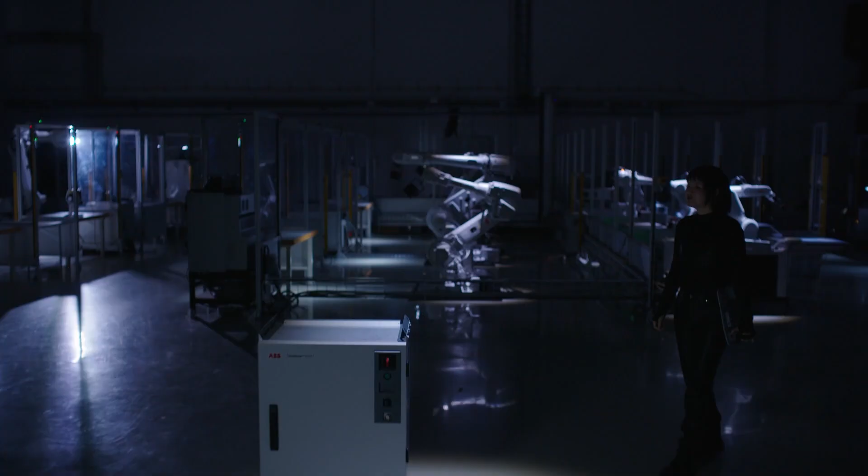Over the course of our programme, I'll be welcoming ABB Robotics leadership as they introduce the latest milestone in ABB's history of innovation, entering a new era of intelligent automation. Later, we will see this groundbreaking innovation in action with a truly spectacular feat of robotic programming, something you don't want to miss. Following that, I'll sit down with our leaders to answer some of your questions live. But first, to tell us more about this exciting announcement, please welcome President of Robotics and Discrete Automation, Sami Atiya.

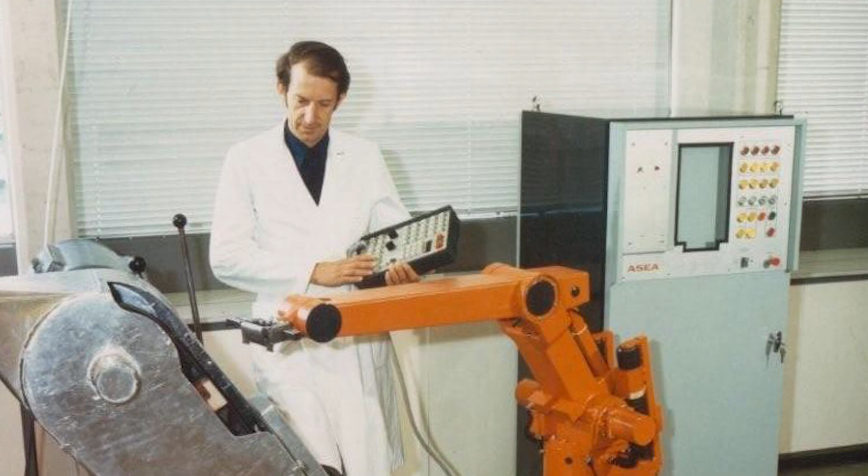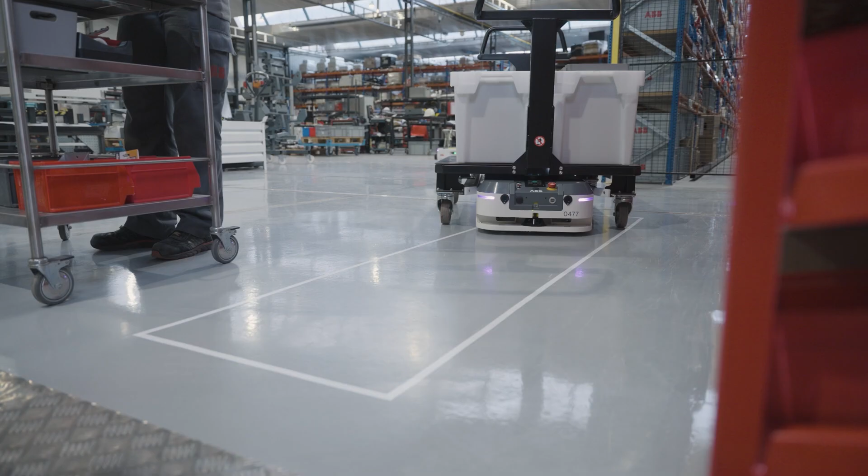50 years ago, in 1974, ABB launched the world's first microprocessor-controlled robot. In those early days, we focused on large industrial robots, primarily for the automotive industry. Since then, we have expanded our mechatronic platform to meet the needs of multiple industries, developing a unique offer, including autonomous mobile robots, cobots, industrial robots, and machine automation solutions for the entire value chain. We have also continuously evolved our software, including AI-based solutions, building on an integrated mechatronics offer that is meeting more demands for more industrial sectors. Since RobotStudio was introduced in 1998, it has revolutionized programming, opening the doors for working with our robots without the need for specialist programming skills.

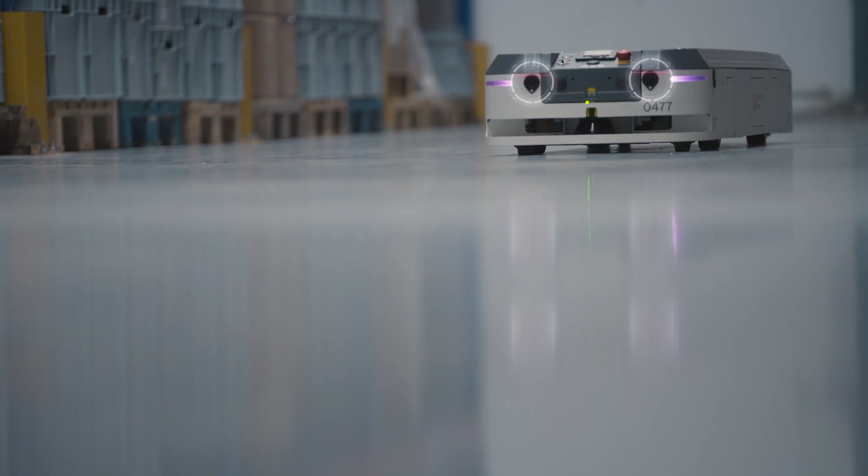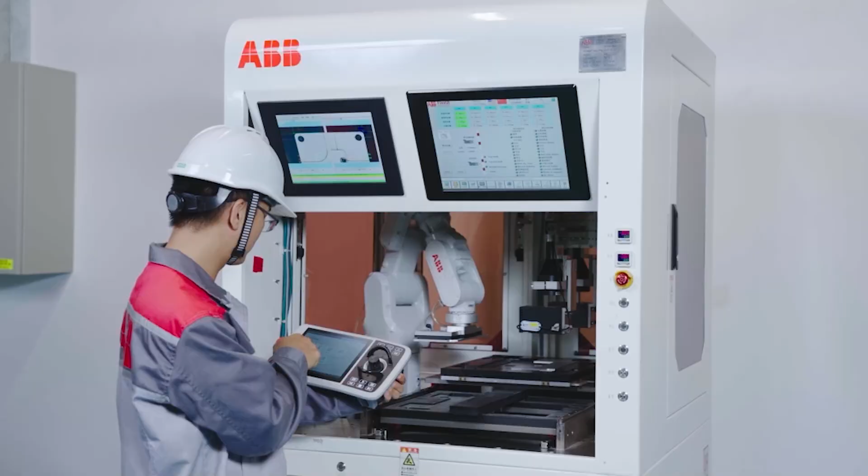Early this year, through our acquisition of Sevensense, we brought industry-leading AI-based navigation technology to our mobile robots. As a result, our robots are more accessible, more capable, more flexible, and more mobile. They are able to work together with us, with each other, to take on more tasks in more places, handling the jobs that people are no longer available to do, and enabling workers to take on more rewarding roles. And in doing so, making our customers more productive.

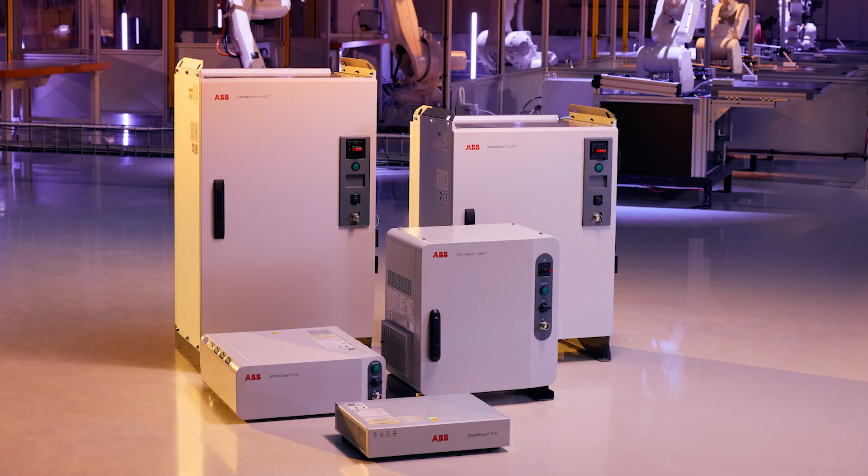But the inescapable reality is that more technology can create more complexity for operators. That is why today I am delighted to announce a new milestone in our journey towards a new era of intelligent automation. A unique single control architecture offering one platform and one language to integrate our complete range of hardware and software. We call it OmniCore. OmniCore is part of an over $170 million investment in next-generation robotics hardware and software at ABB.

OmniCore is a step change in integrating and managing multiple robots in an automated system, the latest and greatest advancement in robotics control. For our customers and our partners, OmniCore enables us to channel our sector expertise and the breadth of our robotics hardware and software portfolio under one platform to make it easier than ever to harness the full power of ABB Robotics. For our customers, it provides even greater simplicity and flexibility.

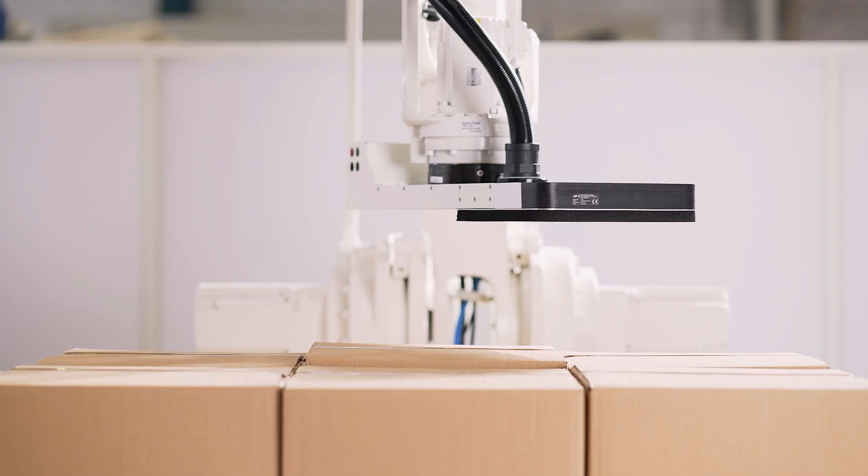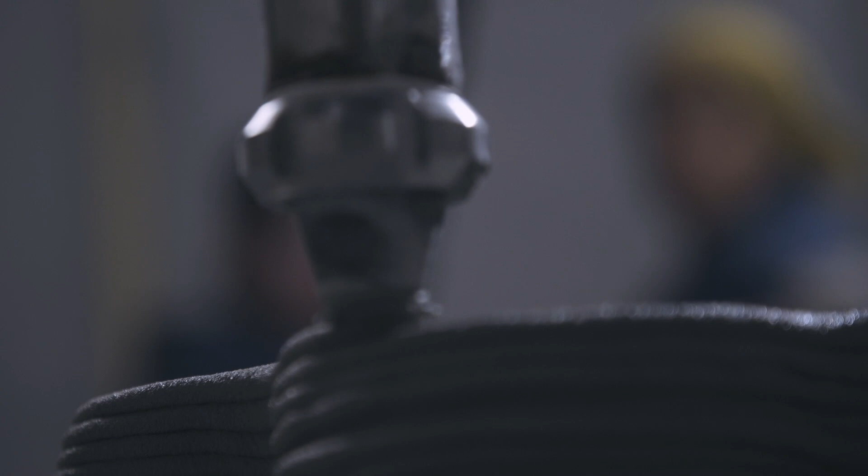Flexibility and simplicity are increasingly critical operational factors for our customers, for whom automation is becoming a strategic requirement. Three of four European companies struggle to find professionals with the necessary skills, such as welding, for labor-intensive operations such as logistics and fulfillment. Similar forecasts in the US suggest that more than 2.1 million manufacturing jobs there will be unfilled by 2030. The shortage of these skills is a global trend, and it's just one that is impacting businesses right now. There are other challenges for businesses today, such as global disruption and uncertainty in supply chains, and the pressure to produce more sustainably.

This creates an overriding need for automation, and a need, in sometimes complex tasks and processes, to provide robots with new skills and make them accessible to non-experts. The answer is in advanced software and control. Through a single platform, OmniCore empowers businesses to work more flexibly and sustainably, building resilience and boosting productivity. It enables automation that is faster, more precise, and more capable, able to deliver higher speed, greater accuracy, and more functionality. And it is future-proofed, with new possibilities for incorporating AI and cloud-based solutions.

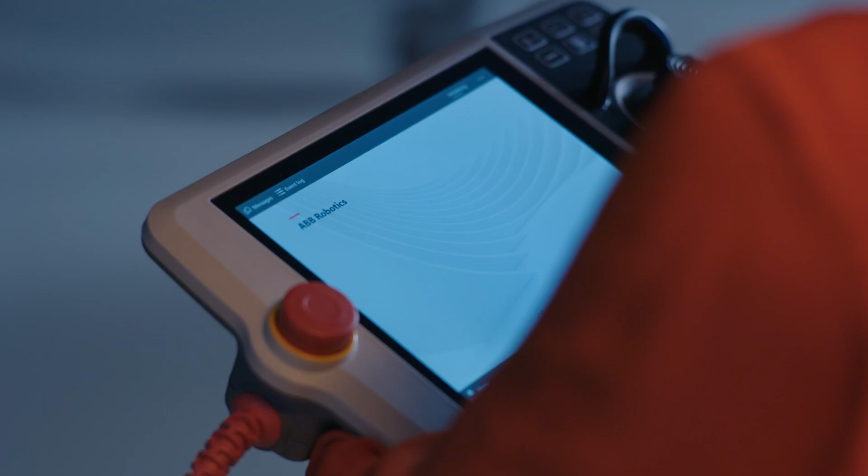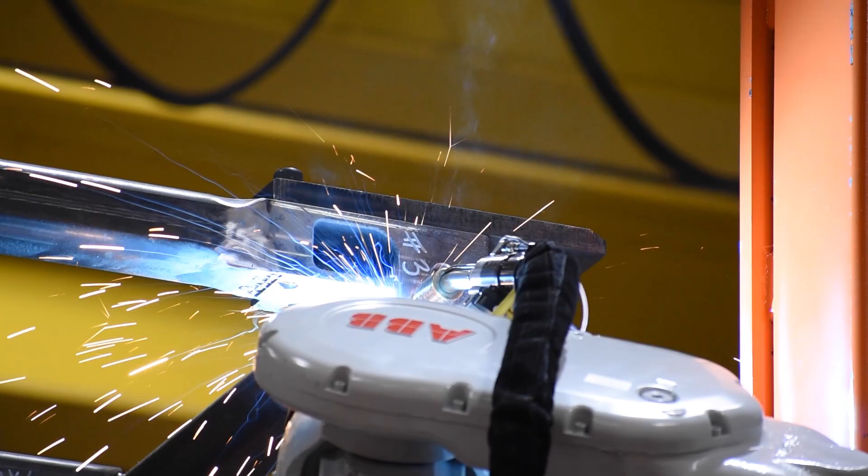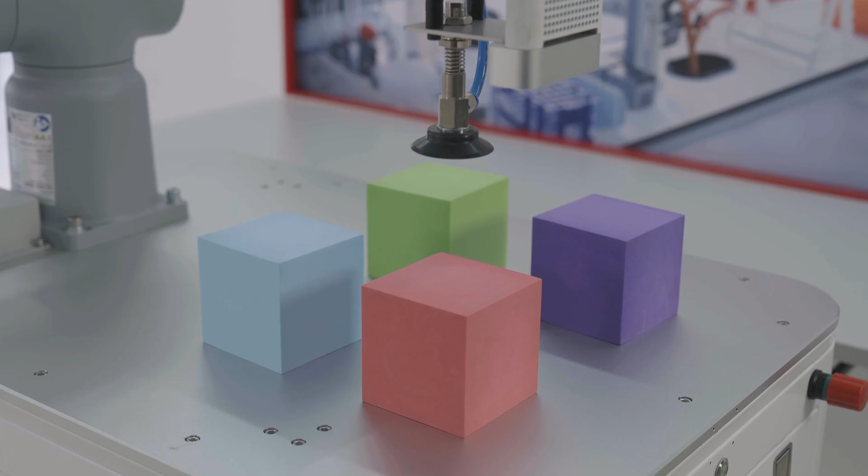The single management interface allows non-experts to have intuitive control of the interplay of robots in a system, and gives those robots new skills. These are focused on critical areas where recruitment of skilled workers is difficult, for example in welding. Our plan is to continually add more skills to this ecosystem from ABB and beyond—apps that can be downloaded as needed, creating a powerful multi-purpose software platform to meet a diverse range of customer needs. Imagine being able to simply download any new skill you need in the workplace, or an app to control a robot just by talking to it. Imagine the efficiencies and accessibilities this can bring.

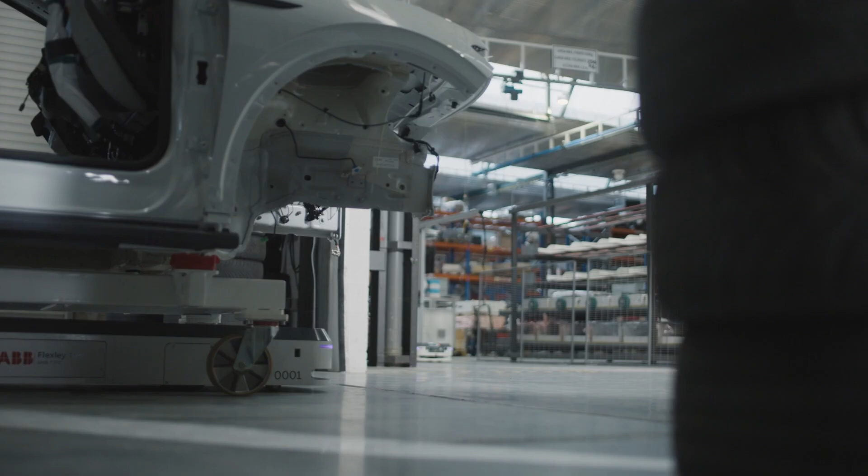This is our vision: to create real transformation across the industry in efficiency, in productivity, in sustainability, and to make work better for people. When you combine intelligent, autonomous mobile robotics with AI-powered learning and the latest in integration and control software, that power unfolds.

Thanks, Sami. And there you have it, the next evolution in robotics software control, a true milestone in ABB's 50 years of innovation. Now, later in the show, we will be seeing firsthand just how groundbreaking this new operating system is, with a stunt that combines three robots, delicate glasses, high speed and precise movements. So don't go anywhere. That's all still to come, but for now, let's find out a little bit more about OmniCore.

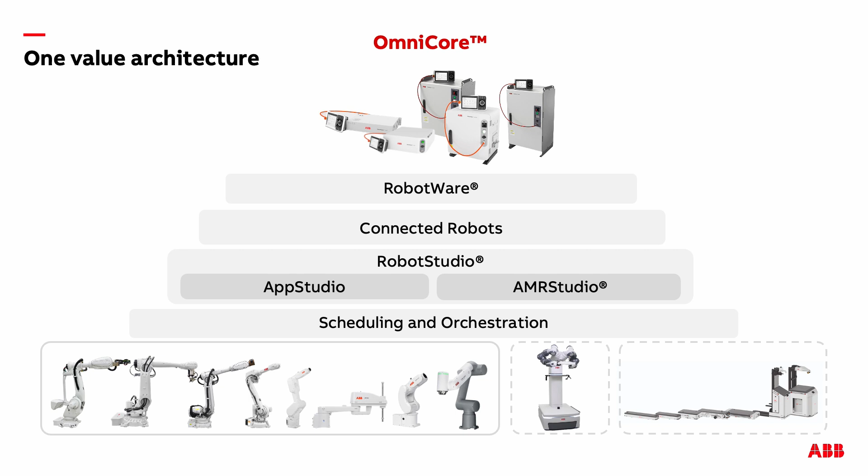Then you have our software layers. RobotWare is the robotic operating system that offers more avenues for value creation, be it through its rapid language, intuitive wizard-easy programming, or AI build skills. RobotStudio is the best tool to simulate systems, from accurate cell simulation to AMR layout and fleet management design through AMR Studio. Then you have our unique hardware.

ABB's application and industry expertise are seen in the functionality of both robots and mobile robots and the unique combination of both. The broadest mechatronics portfolio available is in response to a growing demand for automation in new segments. And now it has the best-in-class control capability.

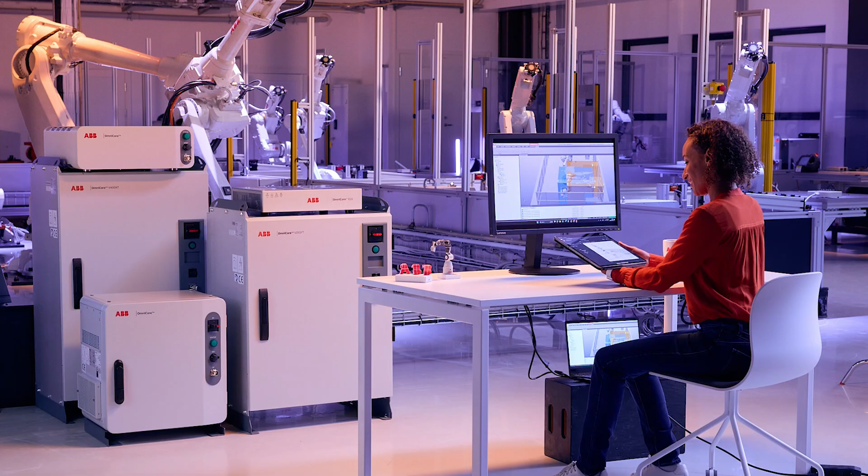With OmniCore, we are offering a big step forward in refined control, transforming efficiency, productivity, and sustainability for businesses of all sizes with modular, scalable solutions.

The OmniCore difference is its holistic ability to manage motion and force and sensor applications in a single unified system. OmniCore opens the door to the entire ABB Robotics portfolio of hardware and software in a combination under a single control platform, offering endless possibilities for customers and more avenues for value creation.

Let's look at the key customer benefits. First, I want to focus on efficiency. OmniCore delivers an unprecedented combination of accuracy and speed to robotics motion control for efficient operations. It can deliver path planning for robot movements to an accuracy of just 0.6 millimeter, and it can do this even with multiple robots running at high speeds of up to 1600 millimeters per second.

OmniCore is open to all major robotics communication protocols, allowing simple integration of peripherals such as sensor, camera, conveyor, or track motion. Through OmniCore, we can control external devices such as spot welding, paint head, glue dispenser, and the robot motion at the same time at high speed and accuracy. This enables very precise applications such as high path accuracy arc welding, mobile phone display assembly, gluing, and laser cutting.

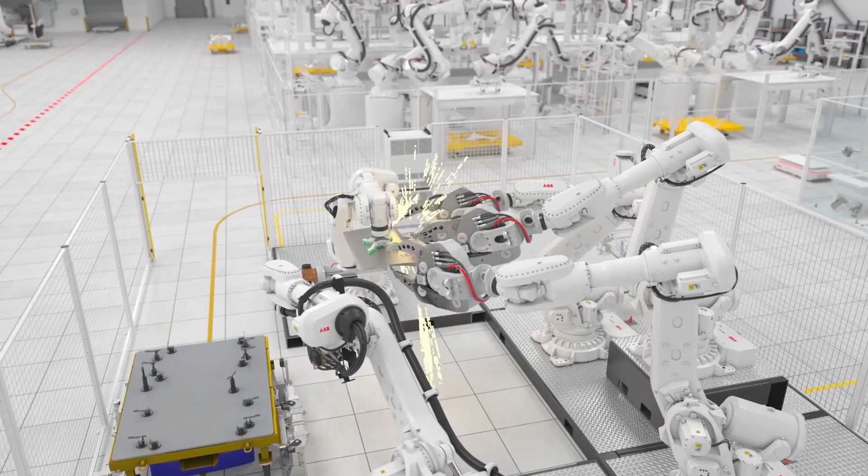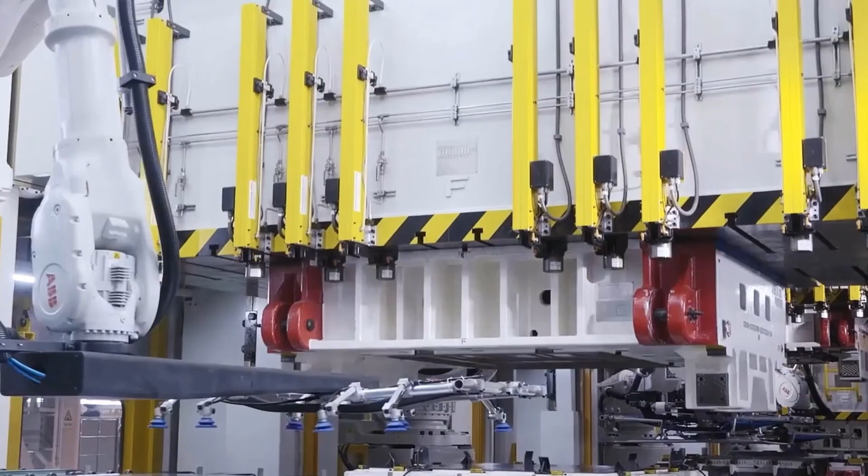Next is productivity. With OmniCore control and integration combined with product design changes in our manipulators, our robots can operate 25% faster versus our previous controller for unbeatable productivity. This can benefit, for example, in press tending in automotive, where we have moved from 12 to 15 strokes per minute to produce up to 900 parts per hour.

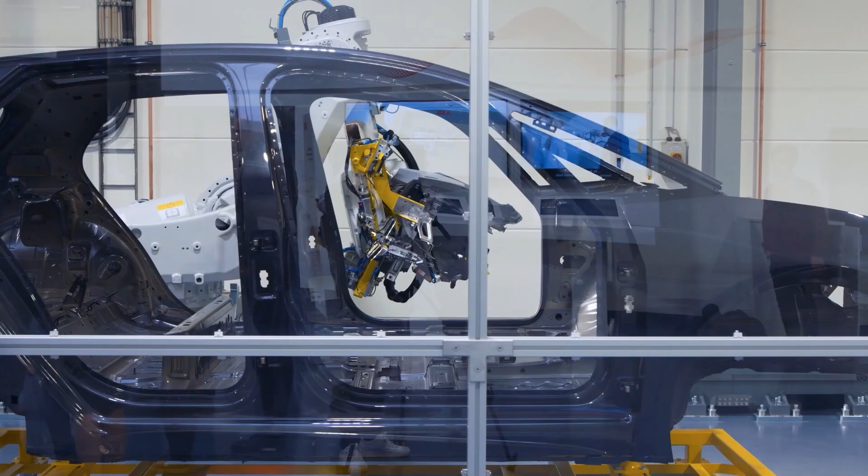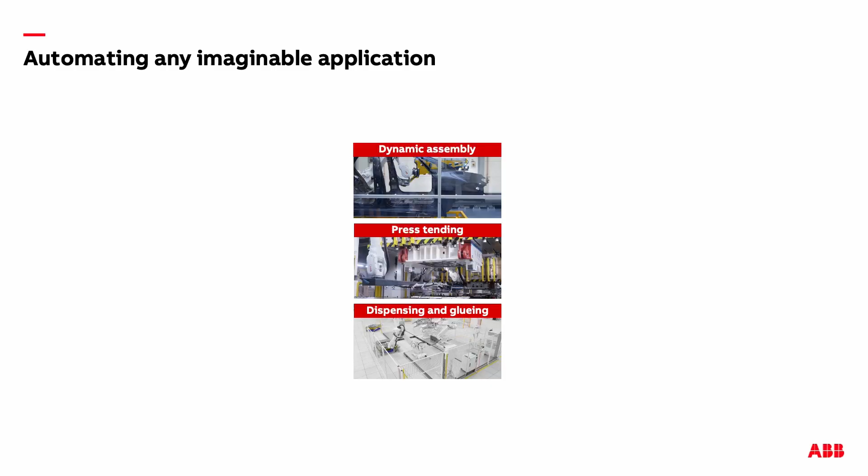We can also, for example, combine motion with force and sensor control, enabling applications that both have a physical contact and follow and track a moving object. So we can place doors on a car body as it moves down an assembly line. And these are just examples of many applications. In reality, OmniCore can control almost any process you can think of.

OmniCore comes with 15 pre-engineered applications, covering everything from spot welding to high-speed alignment, machining, integrated vision, reducing commissioning time from weeks to days. It also supports more than 100 safety configurations, meeting the needs of different use cases while making safety configurations easier to implement than ever before.

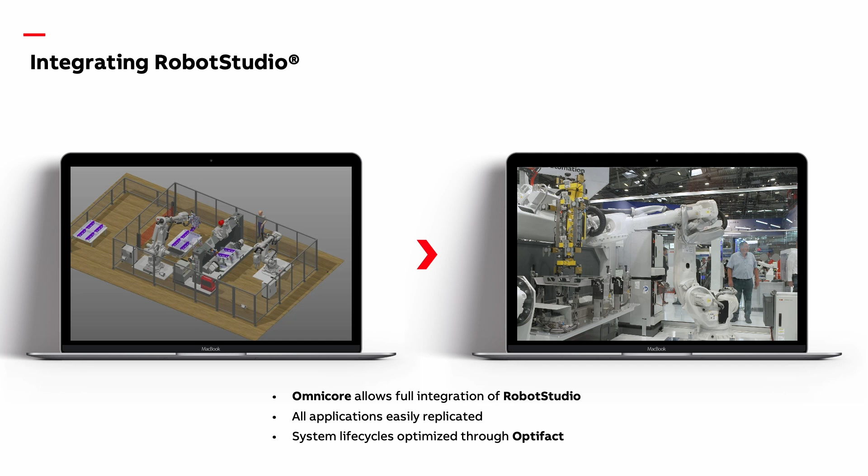In Robot Studio Cloud, you can virtualize your entire operation first. It allows you to design and then commission using a digital twin. So with Robot Studio integrated in OmniCore, all your applications can then be replicated exactly. With OptiFact, finally, you can manage operational data and optimize processes throughout the life cycle of the system.

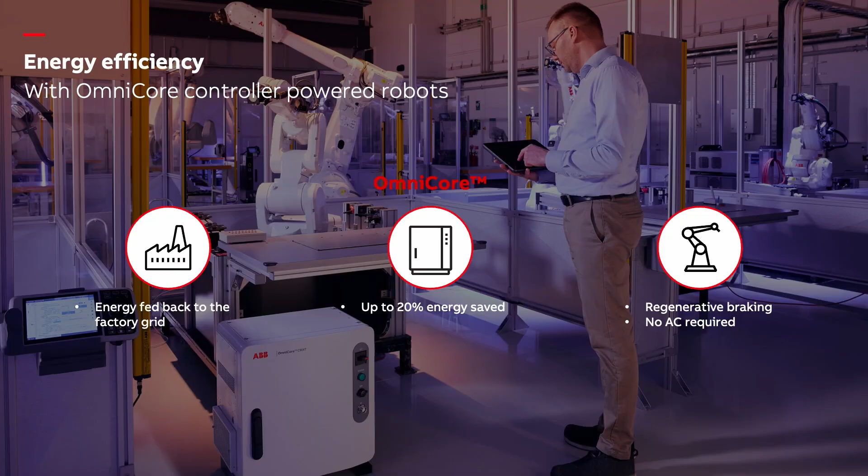Finally, let's look at sustainability. OmniCore's built-in energy regeneration technology can achieve energy savings, for example, in heavy-duty cycles, thanks to a series of smart features and leading-edge technologies. Comparing it with our previous controller, IRC5, OmniCore enables the robots to consume up to 20% less energy than robots running on IRC5, all while the unit's built-in power pack can relay excess power back to the grid.

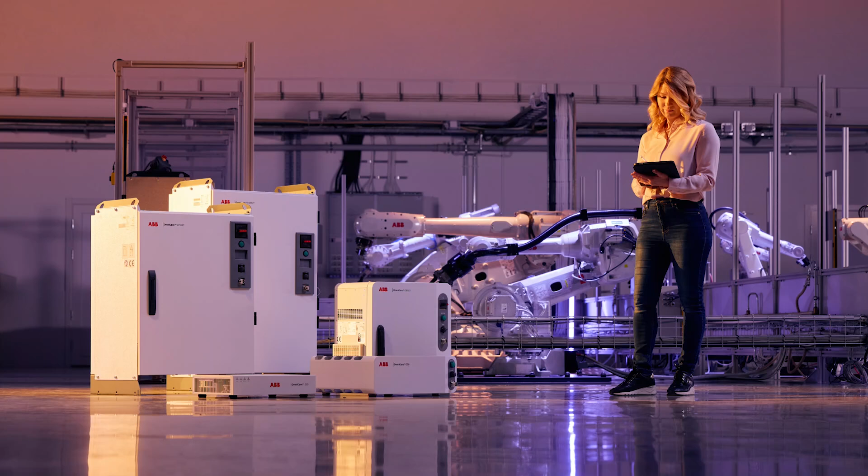Automatic path planning used in Robot Studio can save up to an additional 30% of energy in operations by simply identifying the most energy-efficient robotic movements. We have pioneered software for ease of use in individual robots, from wizard programming to the latest AI-powered learning. OmniCore is the next step, enabling the design and integration of complex automated systems through one interface and one platform. It opens the door to working with our robots today without the need for specialist programming skills.

And importantly, it is ready for the future. Customers will be able to extend the computing power of the hardware by easily specifying more or larger capacities with CPUs, GPUs within the controller. And through the OmniCore ecosystem, we can easily bring new updates and skills to our hardware.

From the groundbreaking IRB6, the world's first commercial microprocessor controlled robot, we have consistently advanced industrial robot design and technology. Pioneering new software creates new applications for our robotics technology, allowing our customers to do more tasks in more places. OmniCore now can automate all these through a single platform, a unique solution that makes companies more flexible, more resilient, and more sustainable, and roles for the workers more rewarding.

Thank you. Thanks, Mark. Great to see just some of the ways OmniCore will help revolutionize efficiency, productivity, and sustainability for businesses of all sizes. Now, it's the moment we have all been waiting for.

In 2009, ABB wowed customers by showcasing the unparalleled speed and accuracy of 2 robots working together in perfect unison, a feat that soon became known as the Fanta Challenge. Today, thanks to OmniCore, we are upping the ante with an even greater challenge featuring faster speeds, greater precision, and higher stakes. It gives me great pleasure to hand over to ABB Robotics Global Head of Product Management, Elina Hermunen, and the all-new OmniCore Challenge.

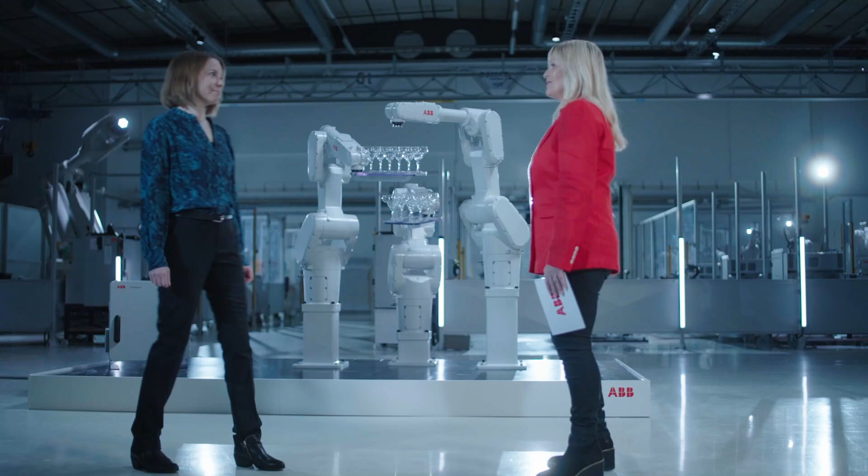Wow, Elina, that was absolutely fantastic. The speed and precision was phenomenal. How much has everything evolved since we saw the original challenge?

Well, the challenge is all about motion control and how accurately the robot is able to follow its path repeatedly. Adding another robot to the mix was the first evolutionary step, and then throwing a third robot into the mix makes it, of course, more challenging.

Now, what happened 15 years ago, in 2009, when the challenge was last introduced, we set the bar really high with a 1 millimeter precision target. And since then, now today, we're trimming that down to 0.6 millimeters, matched and paired with an incredible speed of 1600 millimeters per second.

And not to leave it there, we're also using more fragile glasses this time instead of the cans that you saw in 2009. That's just absolutely incredible.

Who will benefit from these systems? OmniCore is a controller platform, and in combination with any robotic arm from ABB, it can create a lot of extra value in basically any application that the robotic system will be used for.

Of course, when you talk about precision and speed, traditional industries like automotive manufacturing or electronics manufacturing benefit most because they can actually revolutionize their manufacturing with leveled up quality targets and with leveled up productivity to go along with that.